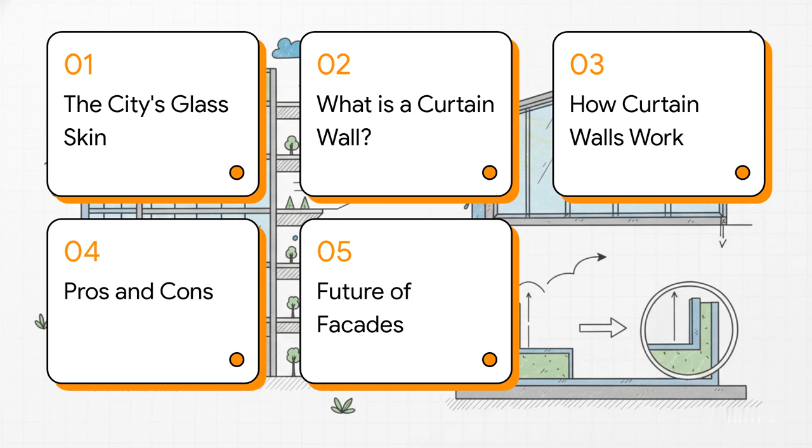So here's the game plan for this explainer. First, we'll talk about how our cities got that iconic glass skin in the first place. Then we'll dive into what a curtain wall actually is. After that, we'll look at how they work, weigh the good against the bad, and finally, we'll take a peek into the super cool future of building facades.

Okay, so picture a modern city in your mind. What do you see? I'm betting it's gleaming towers of glass and steel, right? That whole sleek, almost futuristic vibe, that look of progress. Well, it's not just an architect's whim. It's all made possible by the very tech we're talking about today.

I mean, think about the big ones. The tallest building in the world, the Burj Khalifa, just slicing into the sky. Or the powerful One World Trade Center, reflecting all of New York. Even that incredible spaceship that is Apple Park. The one thing they all have in common: that stunning, seamless skin of glass. And the secret sauce behind it all is the curtain wall.

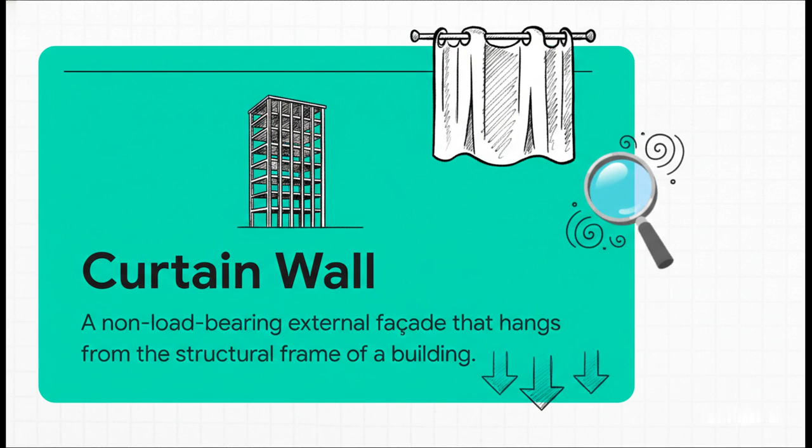So let's get right to it. Time for the big reveal. What exactly is this system that holds up the very face of our modern cities? Okay, here's the secret. The single most important thing to understand is that a curtain wall is non-load bearing. That means it doesn't hold up anything. Not the floors, not the roof, nothing. It literally just hangs off the building's main frame, kind of like a curtain hangs from a curtain rod. Its only jobs are to hold up its own weight and keep the wind and rain out.

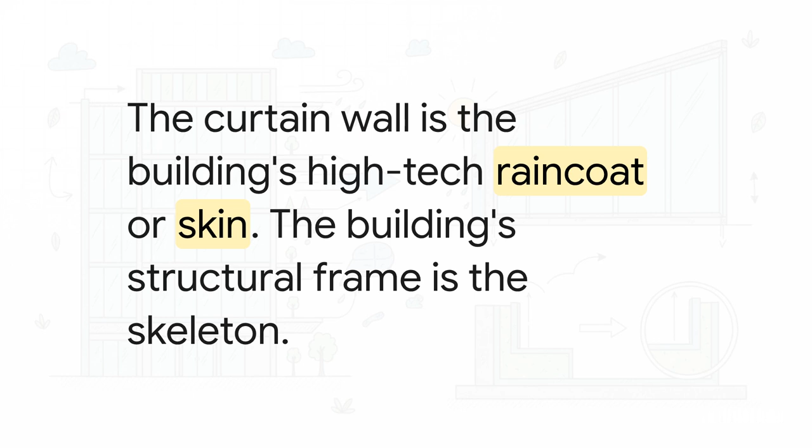This is honestly the best way to picture it. The building's real muscle, its strength, comes from that internal skeleton of steel or concrete. The curtain wall? That's just the high-performance skin. It's the sleek, high-tech raincoat that protects everything and everyone inside.

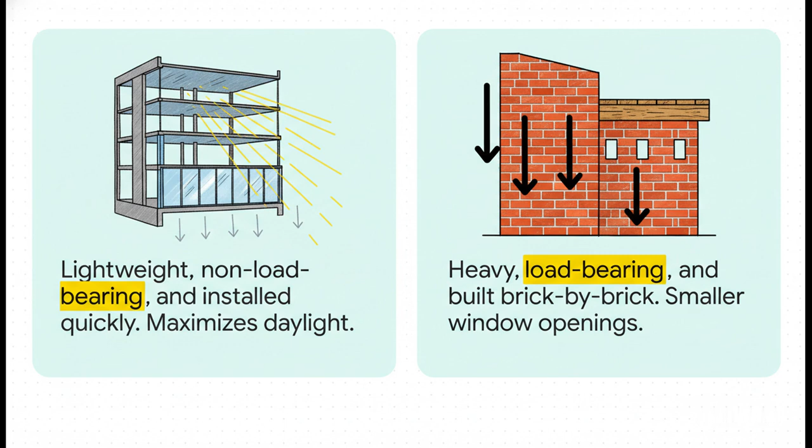And when you put it side by side with an old-school wall, the difference is just night and day. On one hand, you've got a traditional brick wall. It's heavy, it's part of the structure, and it's built slowly, one piece at a time. But the curtain wall is the total opposite. It's incredibly lightweight, it's installed super fast, and bam, it floods the inside of the building with natural light.

All right, so now that we know what it is, let's get into the mechanics of it. How do these giant glass and metal puzzles actually get put together on a skyscraper? At its core, every curtain wall is basically a big grid. The main vertical frames are called mullions, and the horizontal ones are called transoms. They create the openings for the glass you see through, and also for something called spandrel panels. Those are the opaque bits that cleverly hide the building's floors and columns.

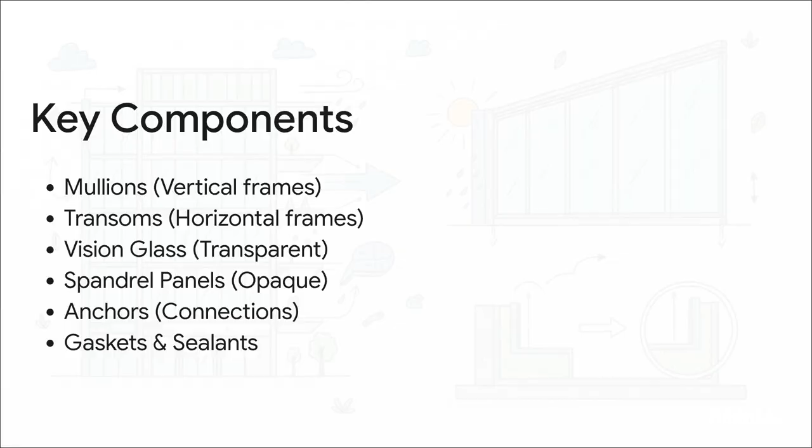Then the whole grid gets bolted onto the building skeleton with these heavy-duty anchors and sealed up tight with gaskets to make it weatherproof. And there are two main ways to assemble this grid. The first is called the stick system, and it's kind of like building with individual Lego pieces right there on site, one mullion, one panel at a time. The other method is the unitized system, which is more like snapping on huge pre-built Lego sections. Massive panels, sometimes a whole floor high, are made in a factory, shipped to the site, and just craned into place. It's a lot faster, and the quality control is often better too.

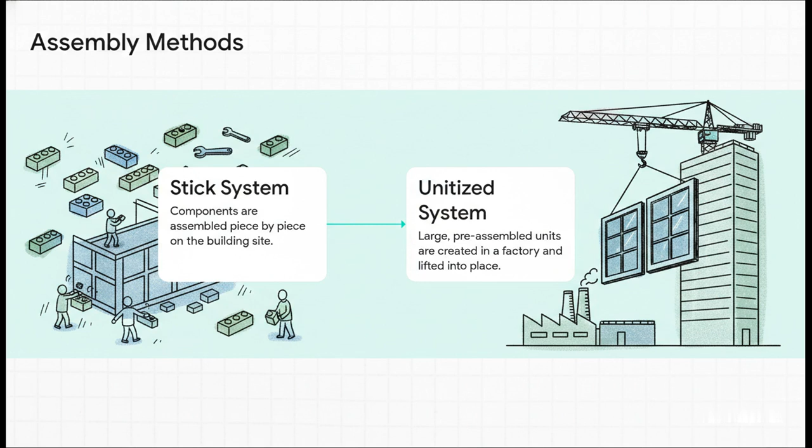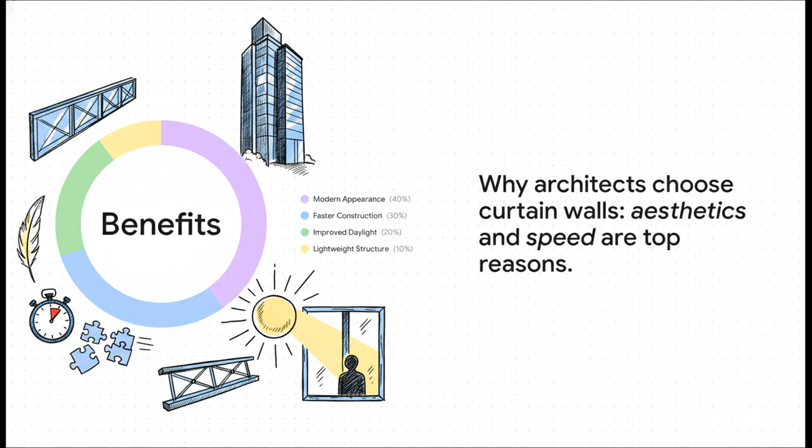But of course, no single technology is the perfect solution for everything. So let's get a balanced picture and really weigh the pros and cons to see why these systems are so popular, but also understand some of the challenges that come with them. So why do architects go for them so often? Well, this chart really tells the story. A huge 40% is just for the look, that sleek, modern aesthetic. But look what's right behind it. Speed of construction at 30%. In the world of multi-million or billion-dollar projects, time is absolutely money. Then you've got the benefits of natural light and having a lighter structure rounding things out.

So here's the trade-off. On one side, you get that incredible look, fast construction, and more rentable floor space because the walls are thin. But on the other side, the initial cost can be high, and you need really skilled workers to install it right. Plus, maintenance, window washing a skyscraper is a whole industry, and all that glass can cause a lot of heat gain, basically turning offices into greenhouses if you don't use high-performance materials.

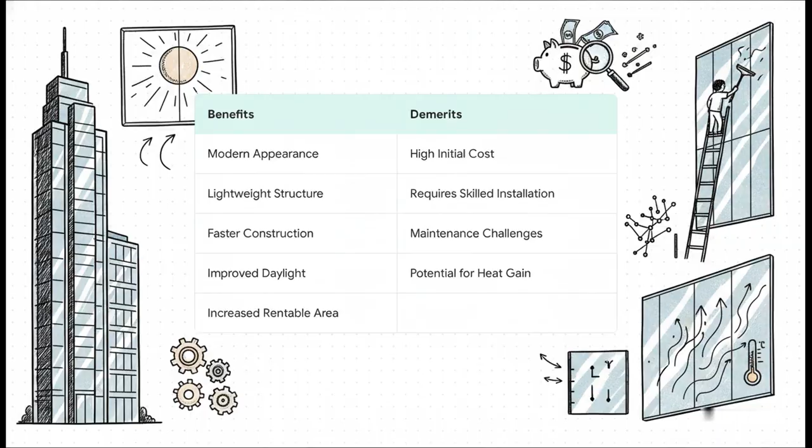Okay, so we've covered the what, the how, and the why. But where is all this technology headed? What does the future of a building's skin even look like? And this is where it gets really, really exciting. We're talking about smart glass that can tint itself on command to block the sun. We're seeing something called BIPV. That stands for Building Integrated Photovoltaics, where the facade itself becomes a giant solar panel. And we're even starting to see AI-designed systems that are perfectly optimized for a building's specific location and climate.

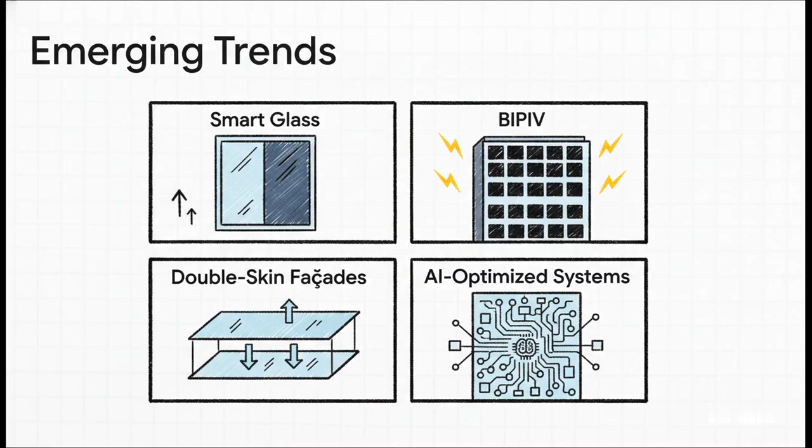And that kind of leaves us with this final big idea to chew on. If a building's entire skin can generate its own power and an AI can manage its energy use perfectly, what does that mean for our cities? The humble curtain wall, which started as just a way to make a building look glassy, could become a key player in the smart, sustainable cities of the future. Something to think about. Thanks for watching.